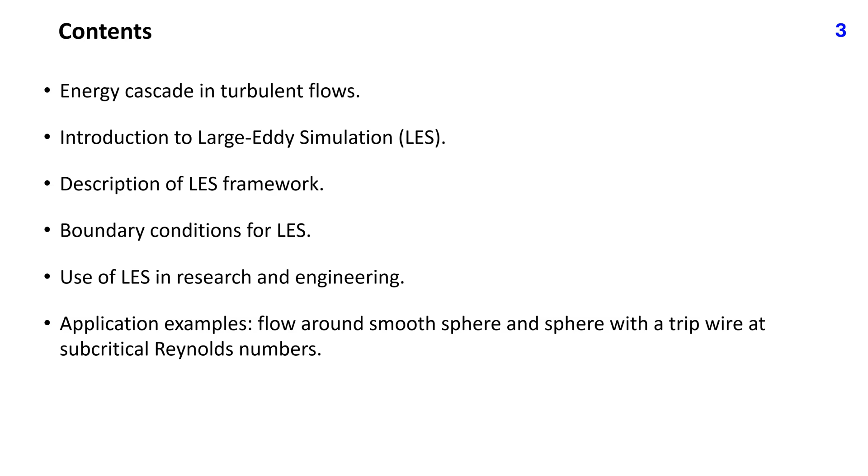In 1922, Richardson described this by a poem: Big whirls have little whirls that feed on their velocity, and little whirls have lesser whirls, and so on to viscosity. In between lies the inertial range. In 1941, Kolmogorov postulated that the energy spectrum in this range must be proportional to the wave number to the power of minus 5/3, which was later confirmed by both experiments and direct simulation of turbulence.

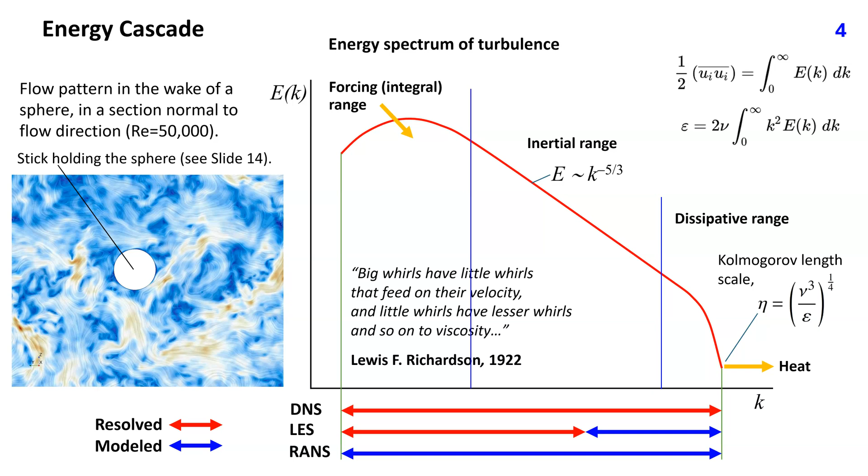Large eddy simulation resolves large turbulent scales and models the small ones. Large scales are problem dependent and thus difficult to model accurately. This is the main advantage of LES over the RANS approach, in which all of turbulence is modeled. Small-scale turbulence is more universal in character, and one can expect that it can be better modeled than turbulence at large scales. It is also assumed that the same model of small-scale turbulence would work well for more flow types.

The computing effort in LES is large because one must perform a transient 3D flow simulation over many time steps, tens or hundreds of thousands. Grid quality is also important. Irregularities can produce artificial fluctuations and thus affect the accuracy of the simulation. Second-order accuracy in space and time is the minimum required. Central difference schemes for convection work better than upwind-biased ones.

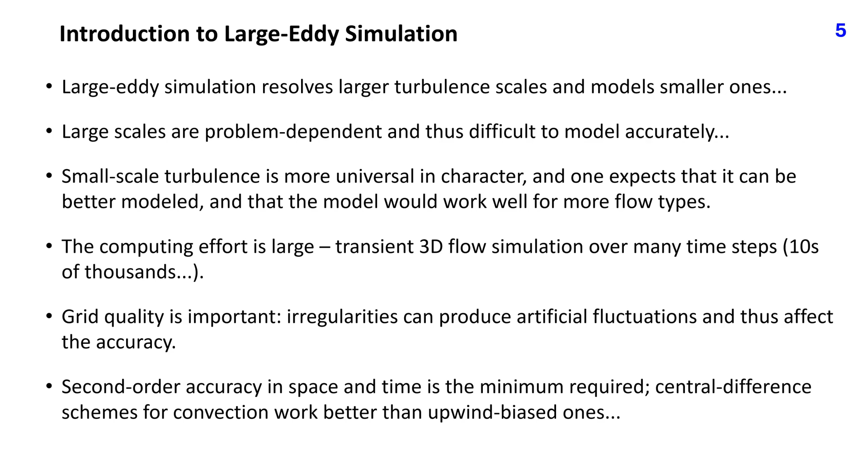Large eddy simulation works with filtered variable values. The filtered velocity component ui at a location x is defined as follows. Here, G is the filter kernel. A box filter is a simple local average. Gaussian and cutoff filters are also used.

x prime is the local coordinate with origin at x. The filtered variable value is effectively a local average over the filter width. The filter has a length scale associated with it, delta. Eddies larger than this size are resolved, the smaller ones are modeled.

If one wants to study modeling errors by grid refinement, one needs to keep the filter size constant. Otherwise, one is resolving more and modeling less on finer grids. This implies using a different model on each grid and arriving eventually at DNS when the grid is sufficiently fine.

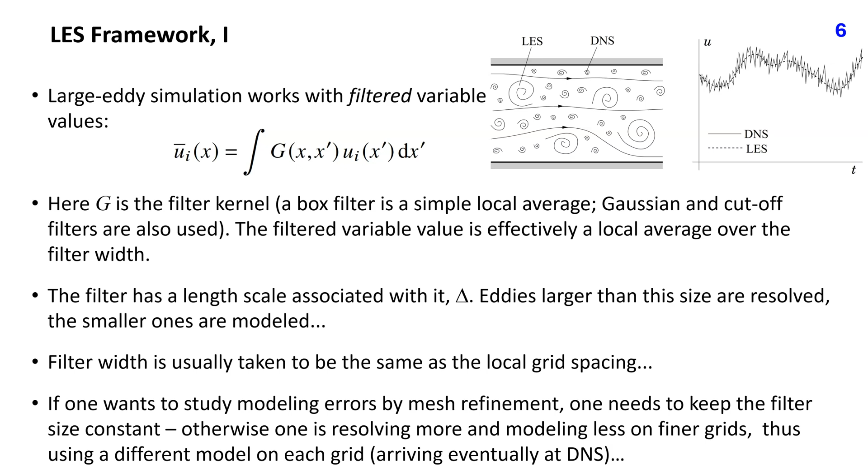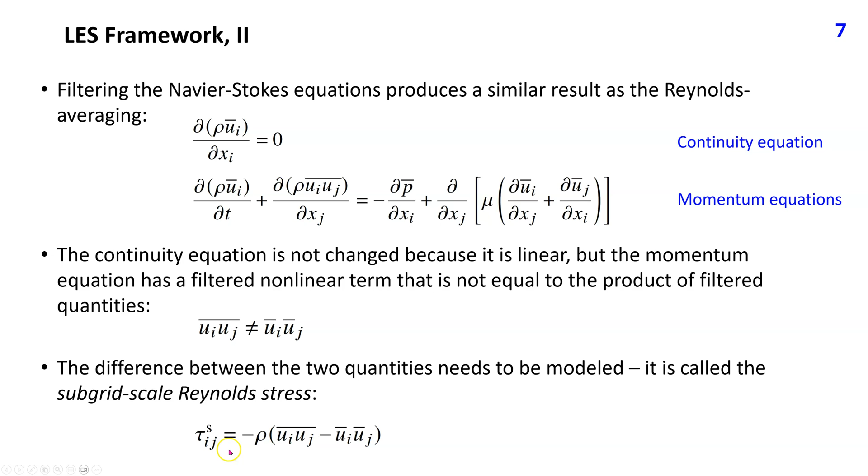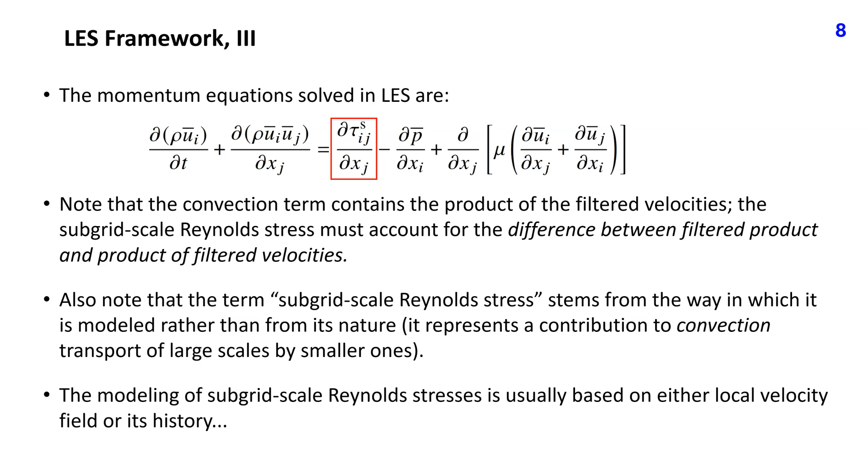The Smagorinsky model is the oldest one and still the standard since 1963. In it, turbulent viscosity is computed as follows. Cs is the model parameter and delta is the filter length scale. Cs is not a universal constant. It is problem dependent and the optimal value can vary between 0.05 and 0.2. The dynamic Smagorinsky model determines the parameter Cs dynamically during simulation by comparing filtered values with two different filter sizes, usually the grid size and twice that value.

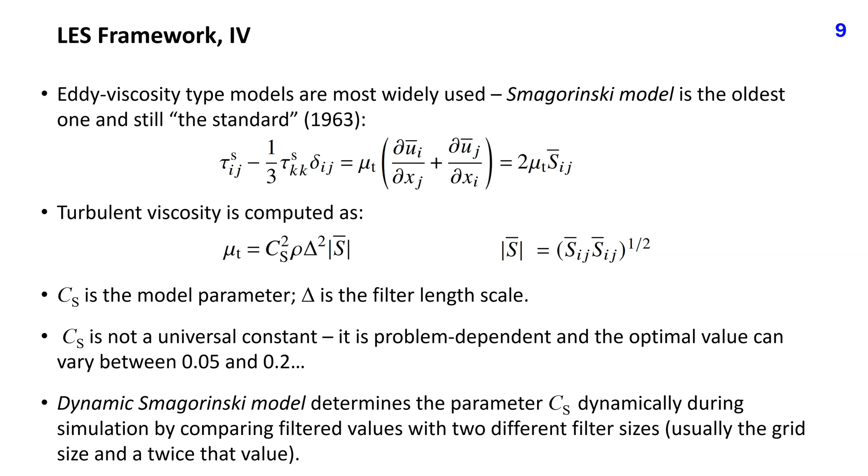In Simcenter STAR-CCM+, the WALE model is also implemented. It is of the same type as the Smagorinsky model, but has different choices for parameters. Many more models have been published in literature.

Detached eddy simulation, or DES, is a mixture of RANS and LES methods. RANS equations are solved in the near-wall region where LES cannot reach the required mesh resolution. RANS models are described in Lecture 32. LES is used away from walls to capture the larger scales and their unsteadiness, which is difficult to model using the RANS approach, especially wakes of bluff bodies.

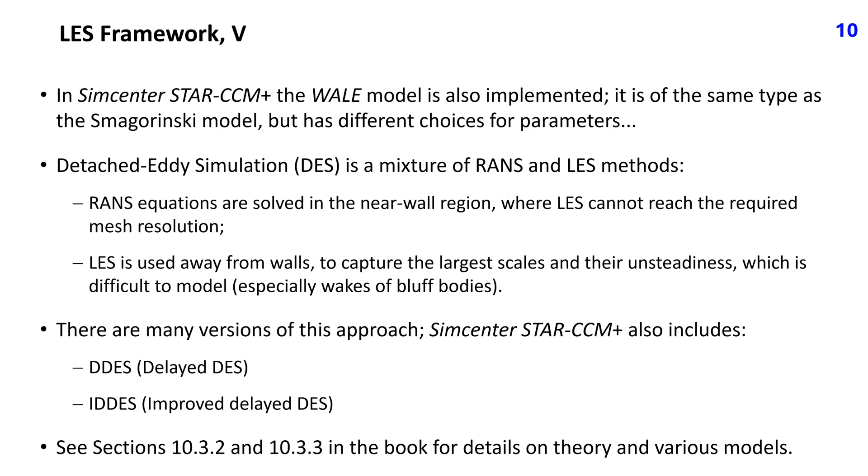There are many versions of this approach. Simcenter STAR-CCM+ also includes DDES, delayed DES, and IDDES, improved delayed DES. See sections 10.3.2 and 10.3.3 in the book for details on theory and various models.

Boundary conditions for LES impose similar requirements to those used in DNS, described in Lecture 30. At inlet, the velocity needs to be prescribed. It should satisfy the Navier-Stokes equations and represent a true turbulent state. In most cases, the exact velocity field at the inlet is not known. There are theories for the creation of synthetic turbulence, turbulent fluctuations around a prescribed time-averaged velocity profile, but they are imperfect. Velocity at an inlet is often taken from another simulation, for example, of a fully developed flow.

At the outlet, either the pressure is prescribed or all values are extrapolated. Extrapolation is usually based on an unsteady convective condition of the following form. Here, u is a velocity that is independent of location on the outflow surface and is chosen so that overall conservation is maintained.

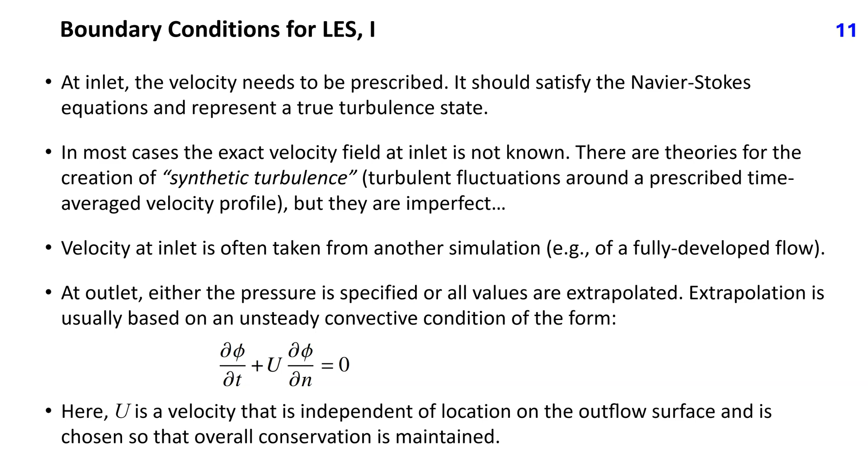For LES of fully developed flows, periodic boundary conditions with a prescribed pressure drop or mass flow rate are often used at inlet and outlet. Periodic conditions are also often used at side boundaries, which should be sufficiently apart, for example, twice the distance over which the fluctuations are correlated.

If the boundary layer at a wall is well resolved, that is, the non-dimensional distance of the first node y+ = ρ u_τ Δy / μ is on the order of 1, the no-slip condition is sufficient. Here u_τ is the shear stress velocity derived from the wall shear stress τ_w, u_τ = √(τ_w / ρ).

The variation of the wall-parallel velocity component with distance from wall is linear up to approximately y+ = 5, the so-called viscous sublayer. So the usual approximations of wall shear stress used to compute laminar flows can be used. If the grid does not resolve the near wall zone, wall shear stress is obtained from an additional model. See section 10.3.3.6 in the book and check this website for more details.

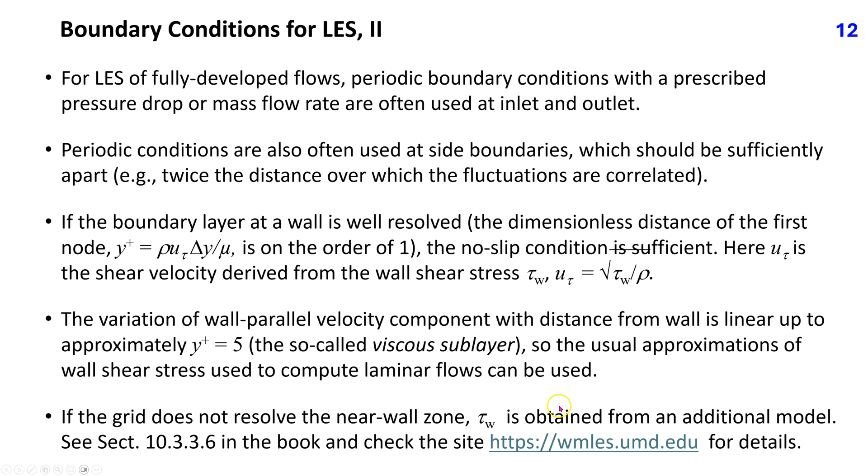Because LES does not need to resolve all of turbulence scales, with the same available computing resources, it can be applied to flows at much higher Reynolds numbers than DNS. This makes LES usable both in research and in engineering practice when accuracy requirements are high and cannot be met by using RANS approach, and sufficient computing resources are available.

LES is also used when it is necessary to better understand the physics of the flow by obtaining data RANS models cannot provide. LES is especially useful in flows for which RANS models are not designed, like flows which are not statistically steady, flows around bodies at subcritical Reynolds numbers, for example, sphere or cylinder, flows involving separation from smooth walls, natural convection flows, etc.

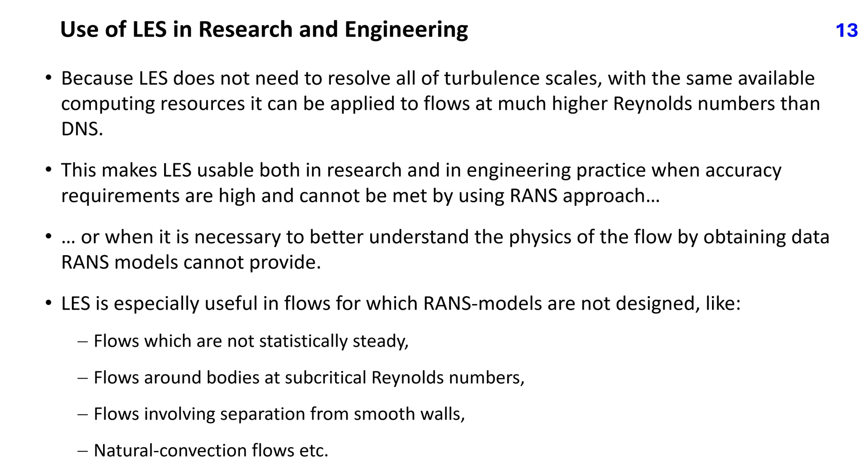We now turn attention to two examples of application of LES. Sphere is a body of the simplest geometric shape, defined by a single parameter, its diameter. However, turbulent flow around the sphere is very complex and difficult to predict. Here we are presenting LES of flow around a smooth sphere and a sphere with a trip wire at the Reynolds number of 50,000. The solution domain is adapted to experimental setup from Bakic from 2002, who performed LDA velocity measurements in a wind tunnel.

The tunnel cross-section is 300 by 300 millimeters, sphere diameter is 61.4 millimeters, a billiard ball. The diameter of the stick holding the sphere in the center of the test section is 8 millimeters. The length of the solution domain is 600 millimeters, and the sphere is positioned at the center of the solution domain.

Constant velocity of 12.43 meters per second was specified at inlet, and a constant pressure at outlet. No slip conditions are applied on sphere and stick walls. On wind tunnel walls, boundary layers are ignored, slip conditions are prescribed. This leads to a slightly lower velocity around the sphere than in experiment, because boundary layers at tunnel walls increase the blockage effect. This will be seen in the comparison of mean velocities from experiment and simulation in slide 30.

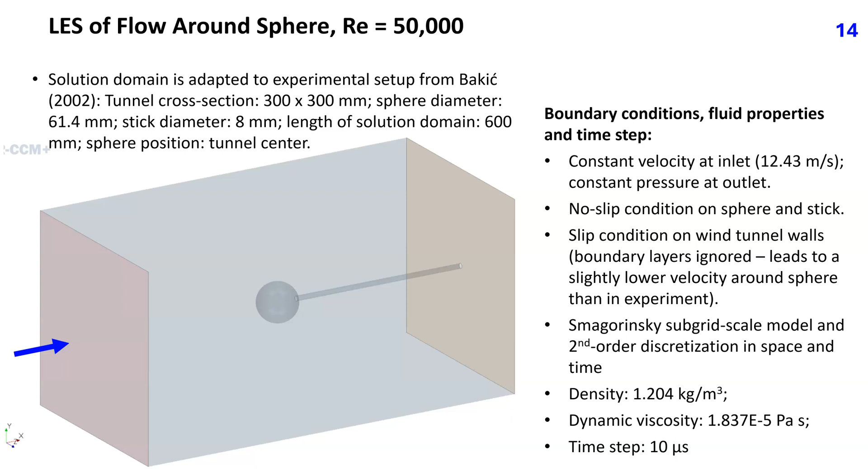Smagorinsky's subgrid-scale model and second-order discretization in space and time were used in Simcenter STAR-CCM+ software. Fluid is air with density of 1.204 kg per cubic meter and dynamic viscosity of 1.837 × 10⁻⁵ Pascal seconds. The time step in simulations on fine grids was 10 microseconds.

Trimmed hexahedral grids with local refinement around sphere and in the wake are used for all simulations. This plot shows longitudinal section through the coarsest grid. This table lists the parameters of the grids used. The thickness of the first prism layer was the same in all grids, 30 micrometers. The cell size in the finest zone around sphere and in the wake was 0.78 millimeters on the coarsest and 0.123 millimeters on the finest grid.

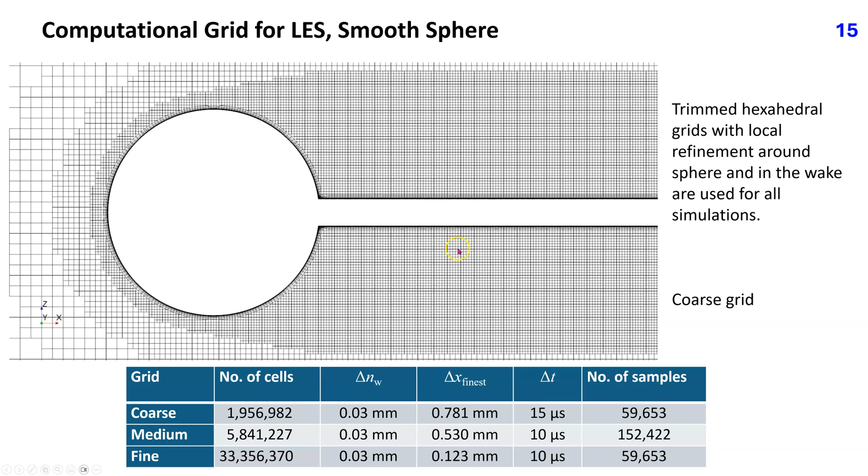In the case of a sphere with a tripwire, the local grid refinement was adapted to the expected smaller recirculation zone behind sphere. In addition, the grid had to be much more locally refined around the tripwire and downstream of it to resolve the shear layer and the separation zone downstream of the wire. This plot shows a detail of grid in a longitudinal section around the sphere.

The tripwire has a diameter of 0.5 millimeters and is positioned at 75 degrees from the front stagnation point. In the local grid refinement around tripwire, the first prism layer next to wall was 10 micrometers thick and the cells were 41.6 micrometers long. Further downstream of the wire, the finest grid had twice these values.

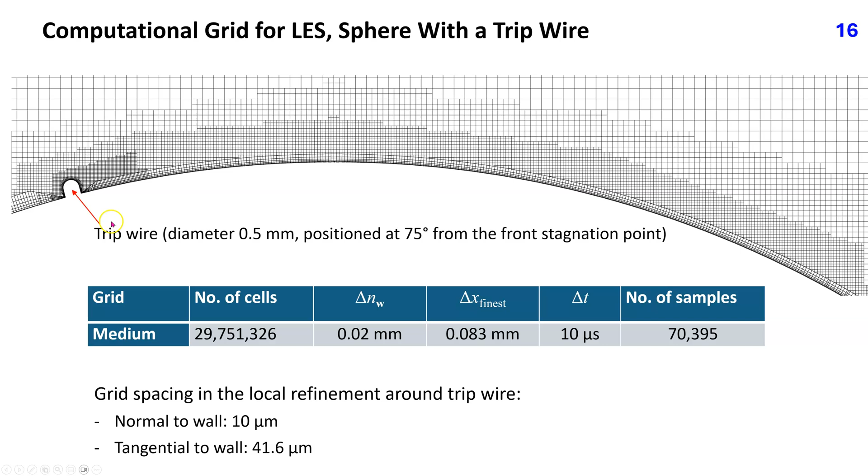In addition to LDA measurements of velocity in a wind tunnel, Bakic also performed flow visualization in a towing tank. A billiard ball with a diameter of 61.4 millimeters was fixed on a cylindrical rod as shown in slide 14 and pushed through stagnant water. Dye was injected at two locations, 70 degrees and 110 degrees from the front stagnation point, respectively. Dye streak lines were recorded with a digital camera with a resolution of 500 frames per second.

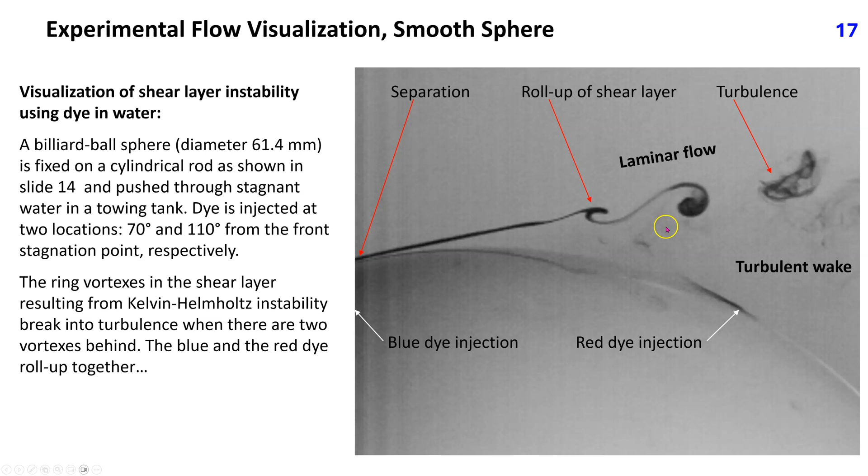In one LES simulation, massless particles were added at about the same locations where the dye was injected in the experiment to produce numerical streak lines. A simultaneous side and top view are important to see the real motion. It shows that both blue and red particles, especially the latter, move a lot in circumferential direction. The circumferential flow variation is relatively slow, which means that long averaging times are required to obtain a statistically steady result, unless averaging is done also in circumferential direction.